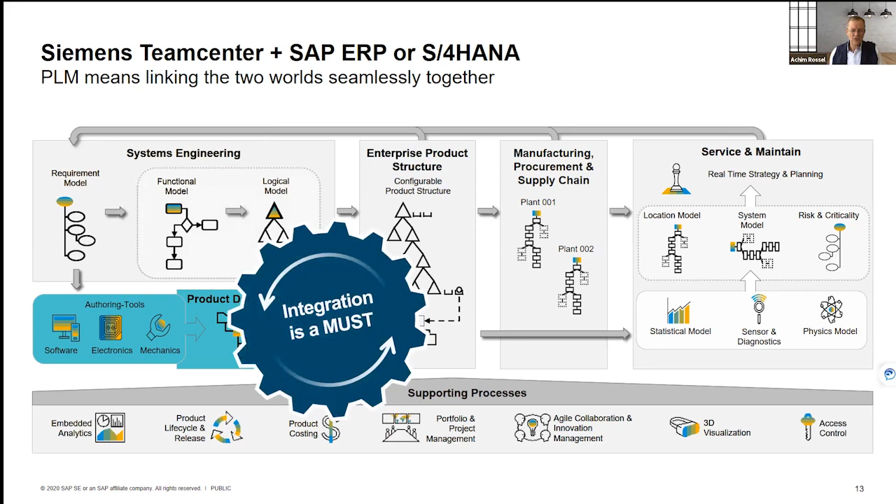The critical point here, by using Teamcenter and SAP, both very powerful platforms in itself—Teamcenter for PLM, SAP for the complete business process, ERP—is to integrate the two. Typically you have data coming from authoring tools: mechanical, electronic, software tools that define the product. This is actually where the digital twin is born and where the data needs to flow into the system. Capturing all this information in the product data management part of this overall process is key to the entire end-to-end process. So integration is a must to make sure that this data seamlessly flows into the end-to-end process, design to operate, in SAP.

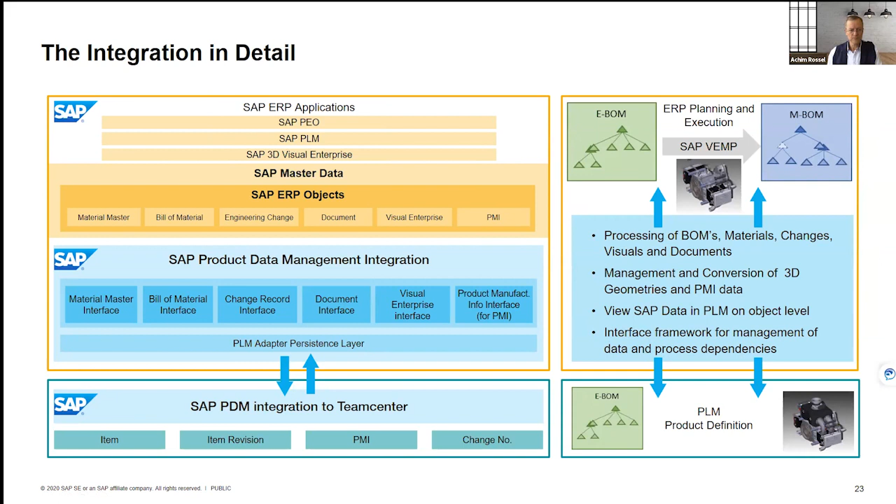The way we do this is we use the T4EA, the standard API of Teamcenter, to collect all the information that we need for this process. We filter this, we complete this, we package it. So even for very large assemblies, we build one big package, transfer this over to PDMI, where we'll have consistency checks, completeness checks, rules being applied, logic, to then promote it into the classic or new objects in SAP ERP or S4HANA.

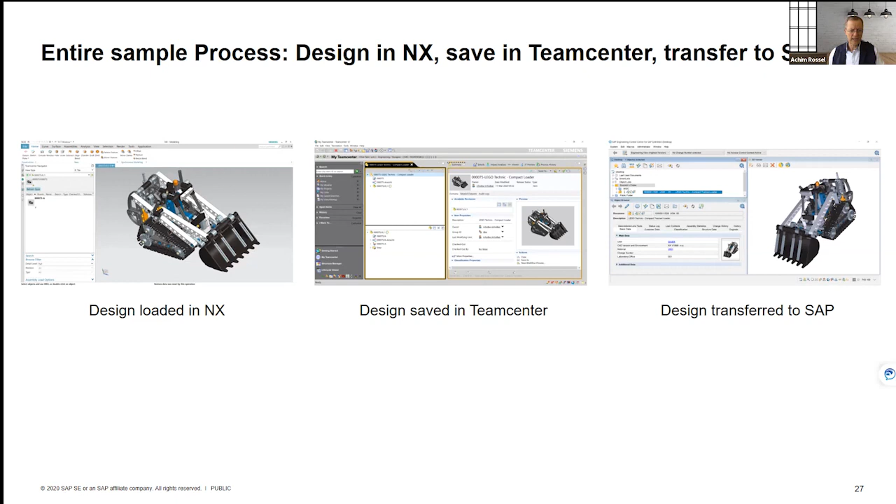What I will show you now is a short video that gives an overview of a very simple use case. I design in CAD, in our example here, NX. I will save the data in Teamcenter and then promote it to SAP. Of course, more business processes are possible. You can synchronize the change processes, the variant configuration, and so forth. But all of these are, of course, based on the standard exchange of that data, as mentioned.

Now this is our demo video. Of course, if required, we can also go into some live demos if you want to know more about how the integration works. So let's have a look at that.

See how I can actually get design data from CAD to Teamcenter, then to SAP. We first start with a small subassembly, and we will load the subassembly here from the active workspace in Teamcenter. This is my normal Teamcenter UI. I can see a Boxer engine assembly here. That's the one I'm working in.

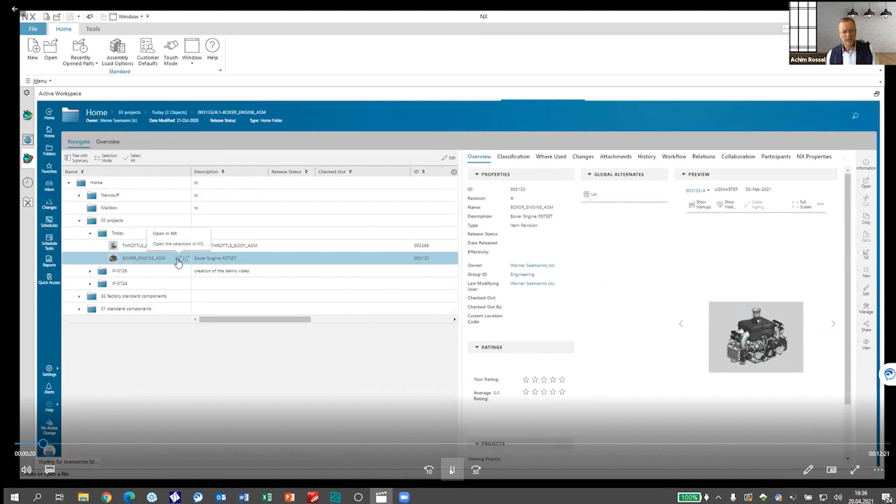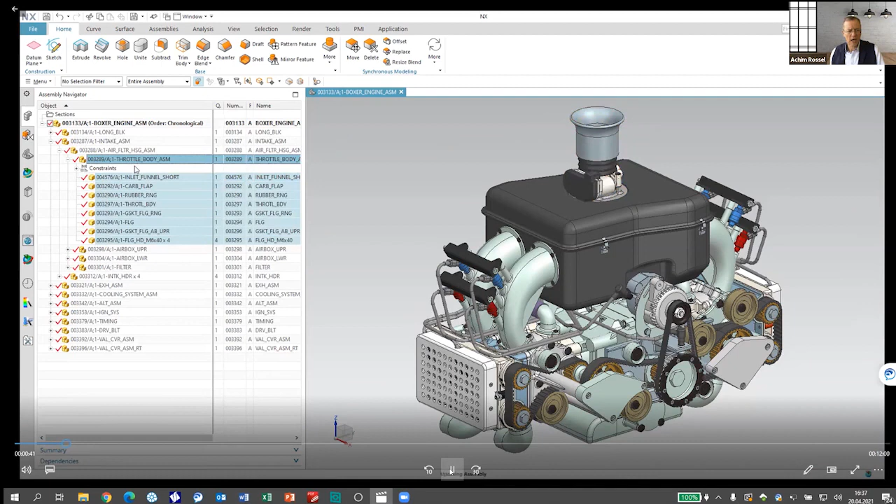As part of this, I will identify a certain subassembly in NX. So what I've done now is I've loaded this from Teamcenter to my CAD environment, to NX. And here I'm selecting one subassembly, the throttle body assembly, which I want to work with. And I can have a quick look at this in itself. This is just pure CAD work, so it has nothing to do with the interface itself.

So you can see the inlet funnel, the short inlet funnel, and I'll work on this later on. I'm looking at the short inlet funnel now. This is our design work, as I said before. Let's just fast forward a little bit. What I'm doing is I will do some modifications and save them back to Teamcenter.

Now I'm back in my Teamcenter, and what I want to do now is transfer that new data to SAP, because this design is not yet known to SAP. I will do so by selecting a workflow that I've built for this purpose. All I need to do is select the top level assembly, the throttle body assembly, select my workflow, in this case a workflow to submit the data to SAP, and hit OK.

And then pretty much that's all I need to do. In the back end, the whole transfer will take place. So the materials, the BOMs, the document data, the links, and so forth, they will all be created. I click on submit, and that's all I need to do.

And while the integration now transfers the data to SAP, the engineer can continue his work in Teamcenter. No need to wait. I can see that the workflow is running in the background.

So what we want to do now is have a look into SAP and see what has arrived here in SAP. There are different UIs I can use. This is a very classic, if not old, UI, the product structure browser in SAP, where I can see the BOM that has been created. You can see the items of the BOM, including my inlet funnel.

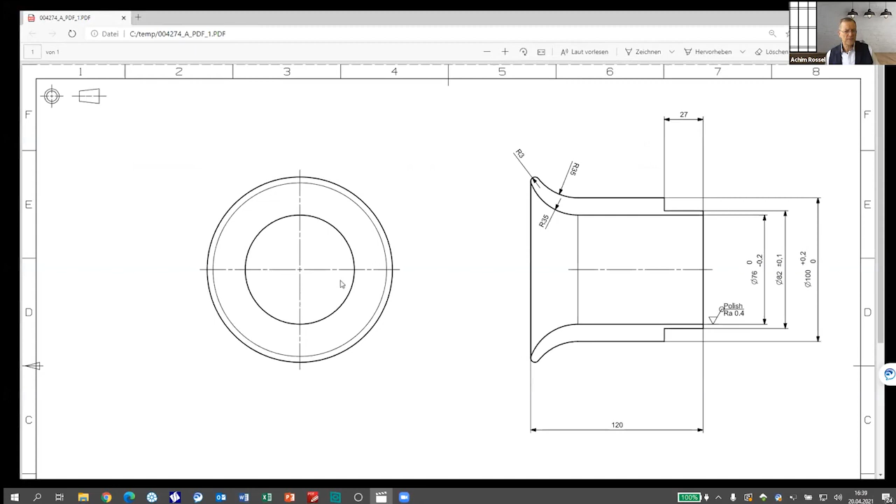I can see the material of this BOM position and the associated documents that were created by the interface. And of course, I can also visualize these, the PDF document with PMI, with all my data that has come from CAD. Here I see a length of 120, which I will modify later on. And the same thing I can do for the 3D, various ways of showing that. In this case, I can see the SAP 3D Visual Enterprise viewer to visualize my 3D information. So that is all available in SAP if needed.

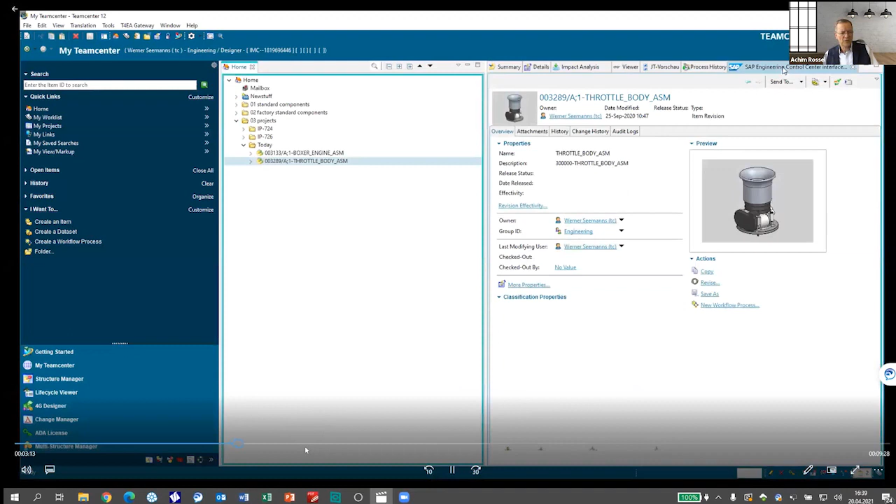But now, of course, let's continue our work in Teamcenter. Here I see the rich application client, and we also see our SAP view that just mirrors SAP data live on the fly. I can review the transfer details to make sure it's all up to date, and I can see the basic SAP data directly in my Teamcenter. So I don't need to actually move to SAP to see that information.

I can see that for the assembly and also for the parts, material numbers were created, material descriptions were synchronized, and for the data sets I can see the related document info record information coming from SAP. All this is configurable, so you can select what SAP information should be presented to the user.

Okay, so that's the very first basic step, just transferring a completely new design to SAP. Now we want to do some modification. What I want to do now is replace this inlet funnel with another one.

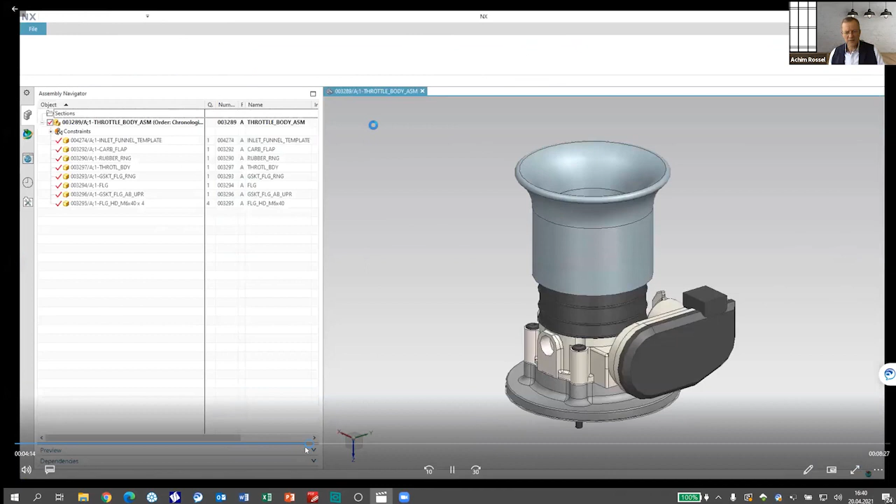Again, I will load the NX data from Teamcenter into my work environment in NX. I will create a new part, a new inlet funnel, just by doing copy as, or save as it was called in NX, and just create a new item.

Again, this is all possible to do directly in CAD. You don't need to go to your PLM system to do that. You don't need to worry about any of the management. You just do your work in your design environment.

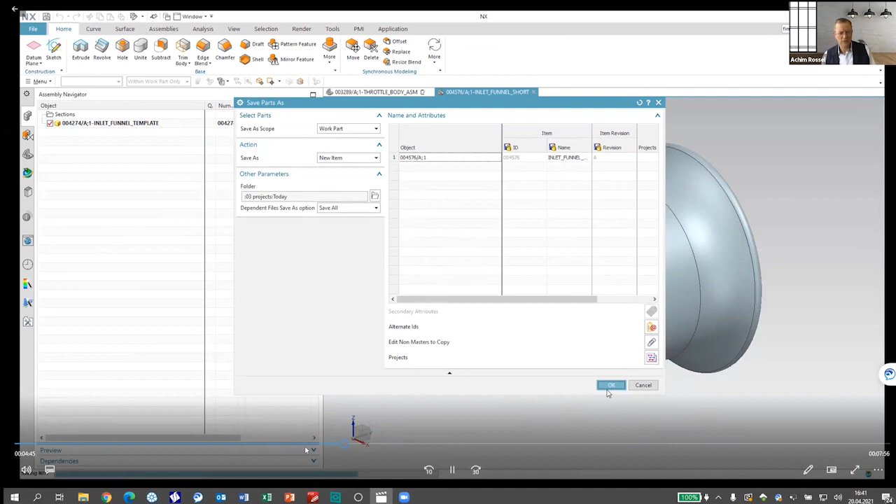So I have now copied this inlet funnel, and I need it a bit shorter. I just changed the length of this inlet funnel to 70. You can also see how it has become shorter.

And now, of course, I'm updating the drawing. This is important because I need the correct PMI later on in SAP to do my work. So I'm updating the views, all classic CAD work, and you can also see the PMI information that was added here.

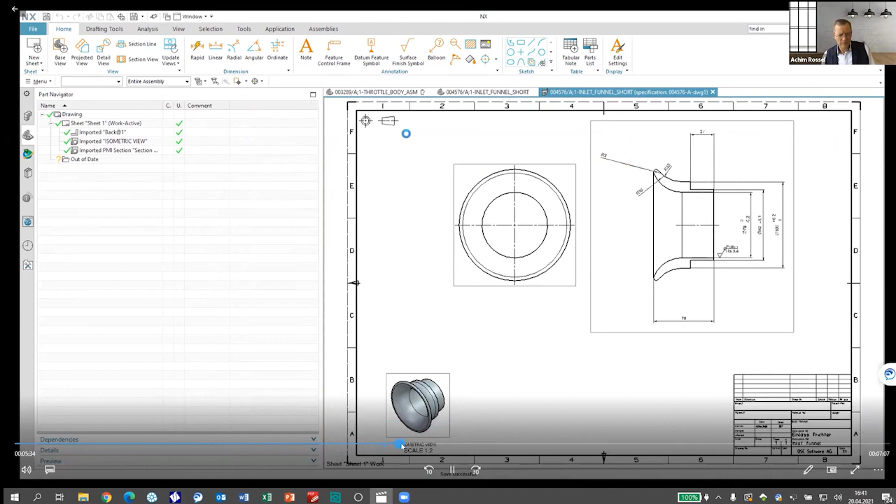Fast forwarding a bit. When I'm done, I can then save my drawing and my new part, and of course my assembly, back to Teamcenter. Hit the save button. There we go.

Now, once I've done my design work, I also want to update my assembly and my BOM in SAP. So again, I do the same thing as before. I select a certain workflow that we have built. You can plug this into an existing workflow, or you can build dedicated workflows for this transfer, either way.

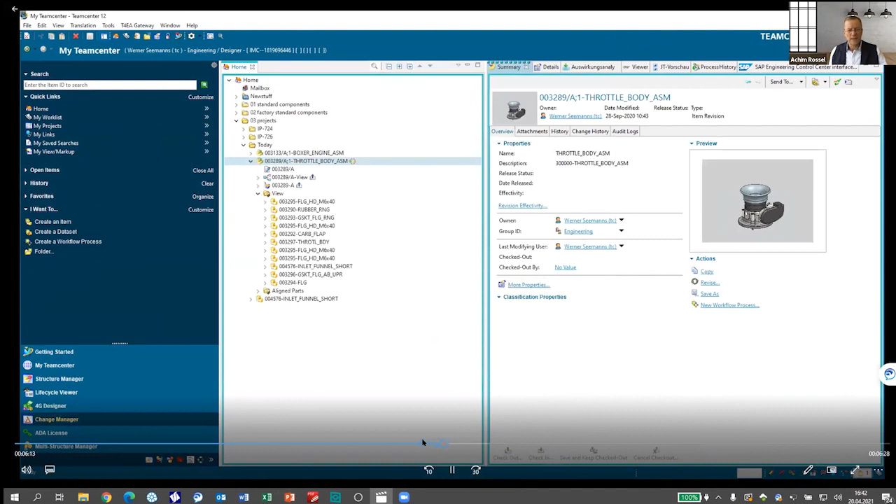And I'm executing this workflow again in the background. The workflow will be executed, data will be transferred to SAP, and without leaving my work environment in Teamcenter directly, I can now see the SAP information for this new funnel, for the shorter one that I've just created.

And I can also see the document data, the PDF or the 3D information that was created in SAP. So this is the document info record for the 2D and then also for the 3D.

Okay, that's pretty much all the engineer needs to do on the Teamcenter side. Let's have a quick look at what has happened in SAP.

In this case, I use a different UI. This is a more engineering-friendly UI in SAP, a so-called Engineering Control Center. It shows me the same information as SAP GUI, Fiori, or a web UI.

So what I'll do here is select and find my right material. Little break here. Go into my folder, look for the material that I've just created, and review the data. This is my material 5160, the new inlet funnel short, as you can see, was also transferred to SAP.

And of course, I can see the details of the material master here, and also the related 2D and 3D CAD documents via the linked objects browser. You see the drawing, and you see the 3D.

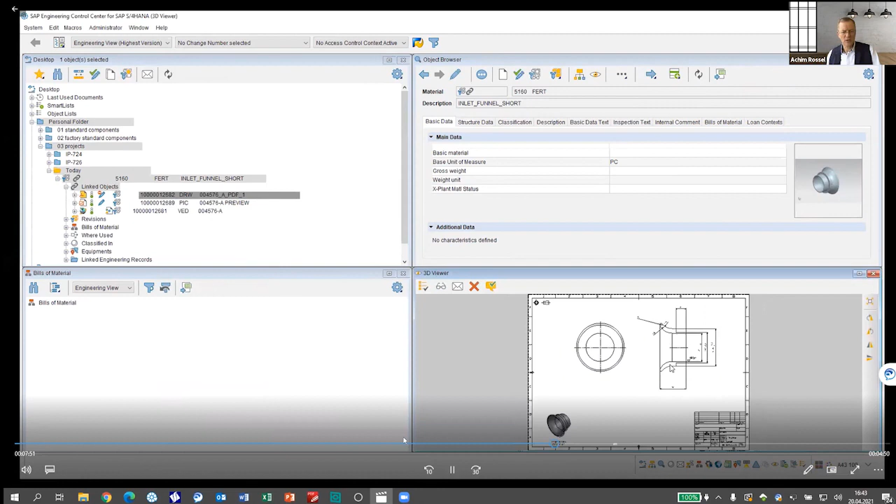I can open the drawing in an external Acrobat reader, for example, or internally in my SAP 3D viewer. And of course, the PMI were also transferred.

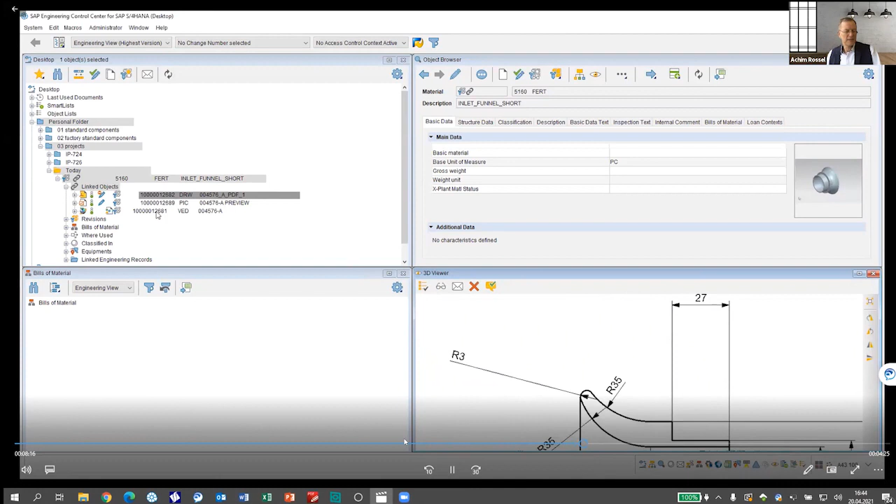Okay, as I said, this is important for later on. The important part here, transferring the PMI, is that we don't just transfer them graphically, so I see the line and the letter here, but we also actually transfer the metadata of the PMI so they can be used in downstream processes for quality processes, for manufacturing processes, and so forth.

And we can see that in the viewer. I can open the panel here, show the PMI or hide the PMI depending on what I need. And then in the structure tree, I can see the metadata for each and every product manufacturing information that was created here in the system, by clicking on them.

Okay, so this is also included in the transfer to SAP.

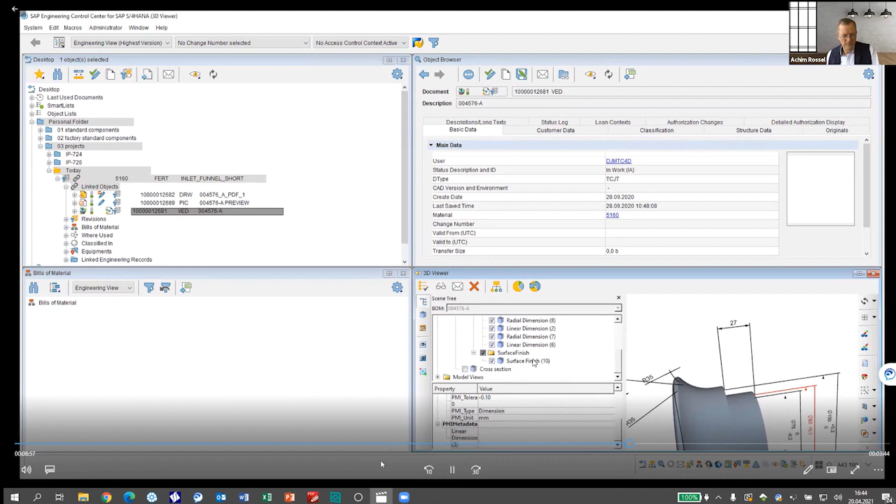Quite helpful. You can select them and see them here. Same thing, we want to have a look at what has happened to the BOM. We would expect that the BOM was also automatically updated, and of course it has been. So we now see a new component in the BOM, the short inlet funnel.

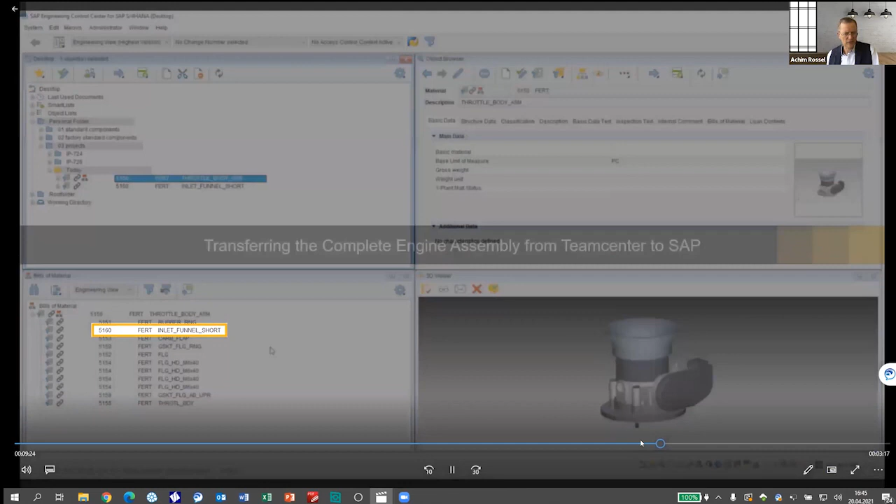Now, we started with showing this engine assembly, but we only worked on the small assembly. Now I'm done with my engine design overall, and I want to transfer the entire design with all its BOMs and structures and whatnot to SAP. In order to do so, the very simple thing I have to do is just select the top level assembly, and again select the corresponding workflow for this.

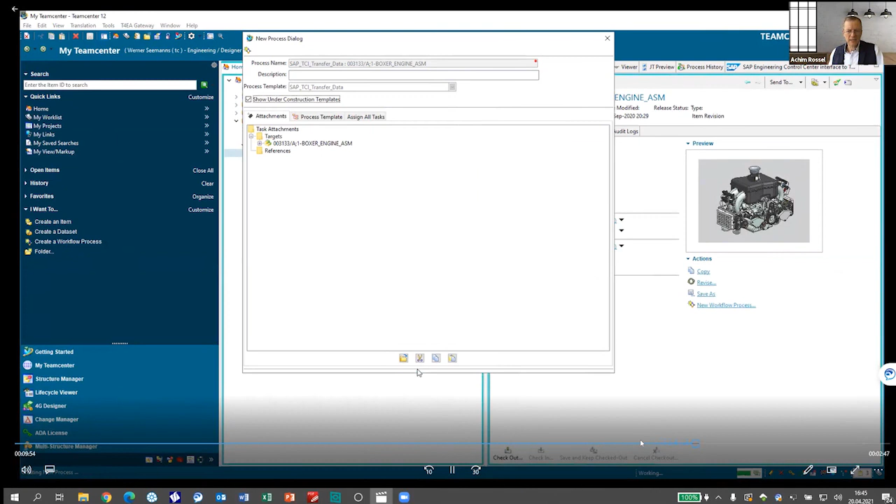Hit it OK, and then the entire assembly will be transferred to SAP. All BOMs, all multi-level BOMs will be created, all material masters, all documents, tons of information. In this example, around about 1,000 single parts with many levels of BOMs. And again, this happens completely in the background.

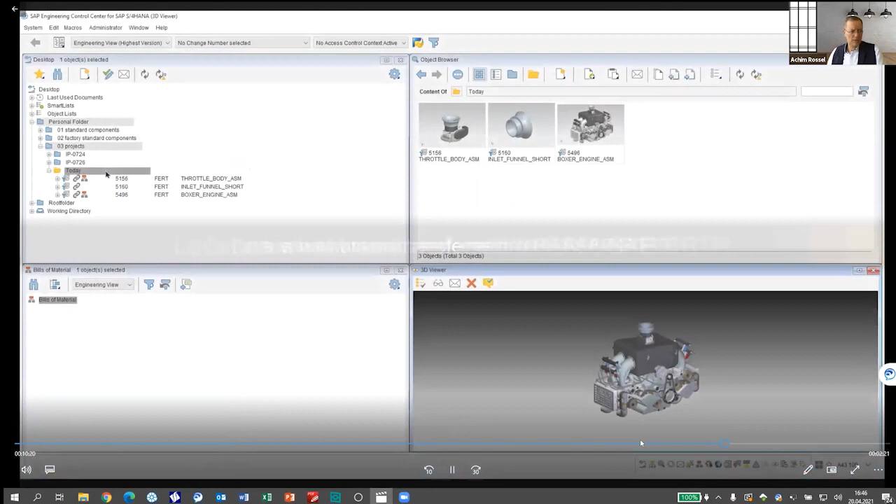So of course, I have a new material master for the top level assembly, and I can also review that on the SAP side. I will use my engineering control center for this purpose because it is a really nice possibility to view through large structures. Here I can see the multi-level BOM structure that was created by the integration, and I can browse through my structure from the boxer engine to the throttle body and to the single parts.

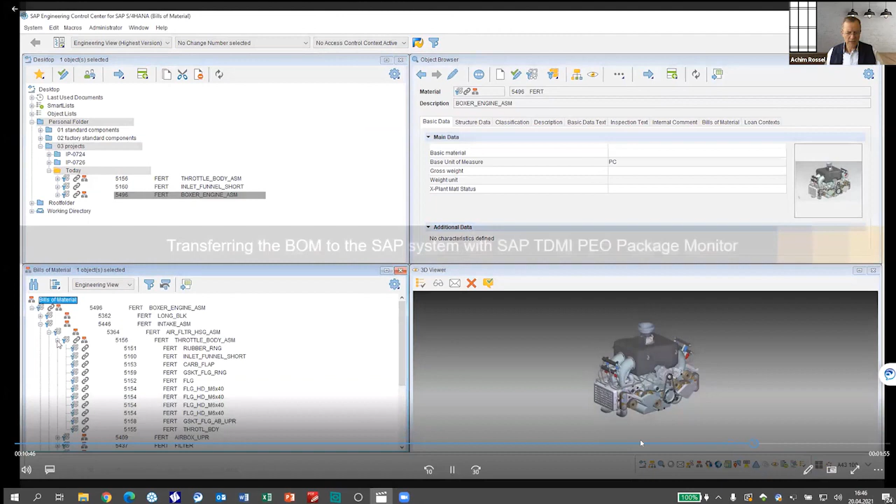So as I said, this is just a very basic use case to make sure that design data flows from Teamcenter to SAP. And if you want to use the SAP PEO, we can also support this by creating the PEO package monitor. Maybe, Chris, we can leave this for a following webcast.

At this moment, I'd like to hand it over to Chris to show the benefits of the integration. Okay, thank you, Achim. That is really excellent.

Very powerful stuff that we saw here. Definitely we will plan to share more in the coming weeks with additional videos to demonstrate the further integration and capabilities. What we just saw was really a powerful integration between Siemens Teamcenter and SAP.

Just a few benefits we'd like to highlight: the seamless management of the entire end-to-end product lifecycle. We really saw that deep integration in a very seamless process. This included the traceability of the product data from its releases, its product development changes, through the entire logistical processes. That's one of the key areas of focus: connecting this deep engineering work with the logistical processes running in ERP.

Total cost transparency throughout the entire product engineering process. So having that complete overview, vision, and transparency that is critical to the entire product lifecycle. The avoidance of data redundancies or manual data entry is very powerful, and we saw this in the demo.